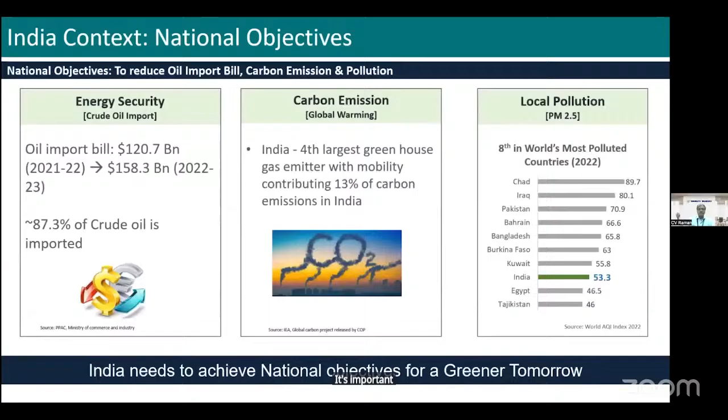And so it's important that we work towards that. Future regulations are focusing on these aspects - emissions, safety, as well as connected vehicle perspectives.

Phase-wise CAFE norms - the first two phases are already there, set in 2017 and 2022. The next phase is under discussion. We have already implemented BS6. For Phase 2, we are going to move to WLTP in 2027.

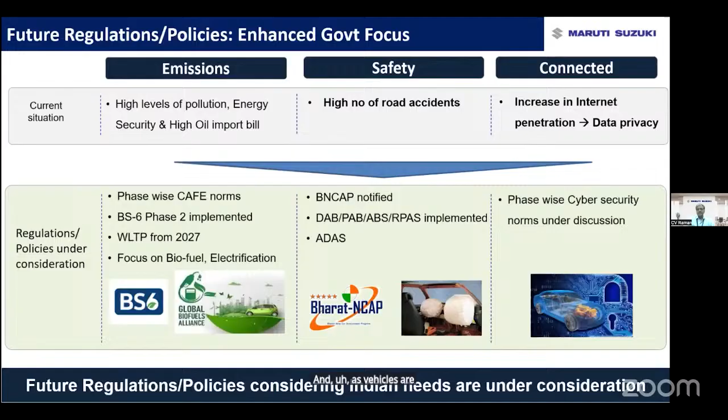There's a lot of focus on biofuels and electrification. From a safety perspective, we already have BNCAP, which has been notified, and we are working on ADAS related technologies going forward. As vehicles get more connected, cyber security norms are also under discussion, phase-wise.

Now coming specifically to passenger cars, you can see the growth that is going to be there. In 2030, we should be almost 6 million, and by 2040, we could be about 10 million vehicles.

Growing this market in a very sustainable way is going to be key. But one thing which is there is that the customer is also changing as we are, and we are making products for the customer.

The customer is always looking at the exterior, the interior, and also the aerodynamics of the vehicles. In a way, we all want to make sure that the customer is satisfied through appealing products, and that's what brings the customer into the showroom.

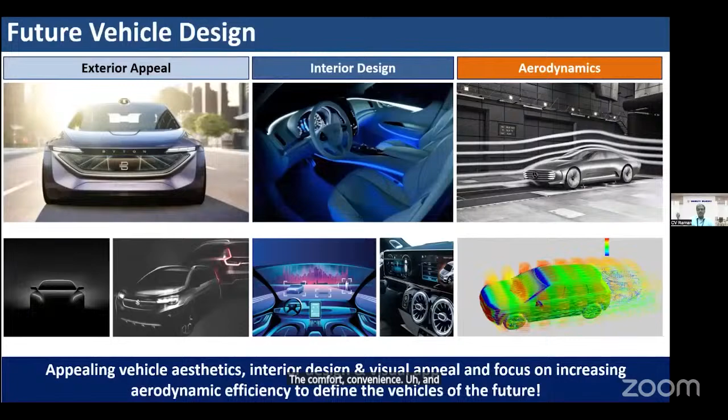But having said that, the next step is that the performance has to be good, and he also looks at the comfort, convenience, and of course fuel efficiency is also important.

Coupled with that, the industry is also working towards various new technologies from a sustainability perspective, and from the requirement perspective - in terms of electric mobility, advanced human-machine interface, as well as autonomous vehicles, or level 2 ADAS, and so on.

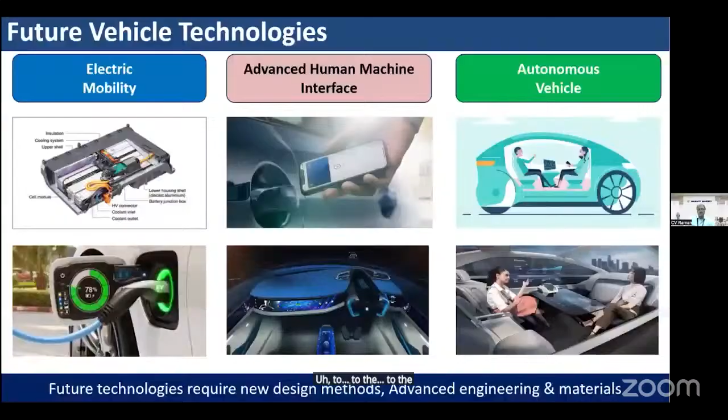All of this is increasing the features in the vehicle, and weight is something which always comes with anything you add to the product. So I think that's one of the key challenges which today all engineers face.

And there are technology disruptions which are happening. We all talk about autonomous, connected, electrified technologies, but today technology disruptions are also happening across other realms in the ecosystem. We need to be cognizant of that and make sure the auto industry is abreast of it, as we go through a major transformation, and that is good.

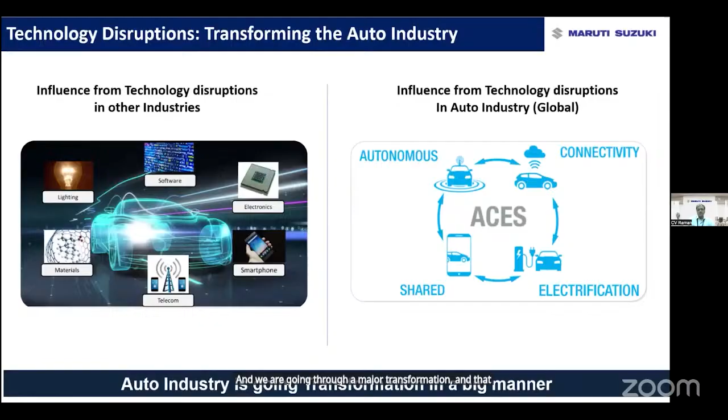We are going to see that in the next 5 to 10 years. The key question is: how do we drive this growth in a very, very sustainable way? So we'll talk a little bit about some of the technologies and things which we in Maruti Suzuki are doing, or we as an auto industry are doing.

We will be continuously upgrading the ICE powertrains, because that's something which is contributing to the fuel efficiency improvements. We also need to look at alternate fuels through CNG, ethanol, and flex fuel vehicles.

We need to look at hybridization, which is one of the key technologies going forward, electrification, and in future, fuel cells. The powertrain is going to continuously evolve, and these environment-friendly and energy-secure technologies are going to be key for mobility going forward.

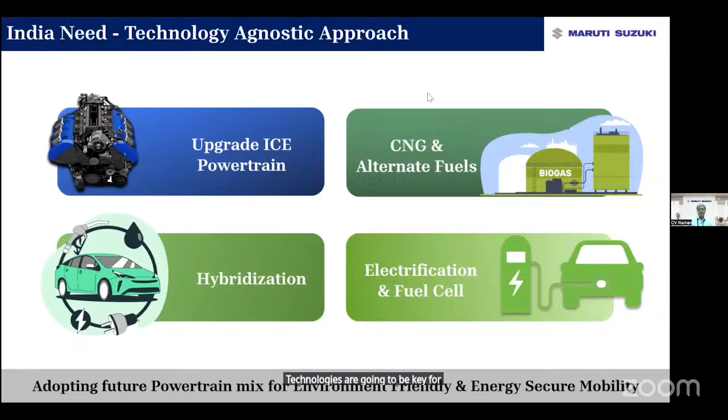But when we look at all these technologies, what I would like to bring into focus is that if you add CNG, there is an 8% increase in weight over the ICE vehicle. If you go to strong hybrid, the weight goes up further, and if you have an electric vehicle, the weight goes up even further, almost 1.5 times.

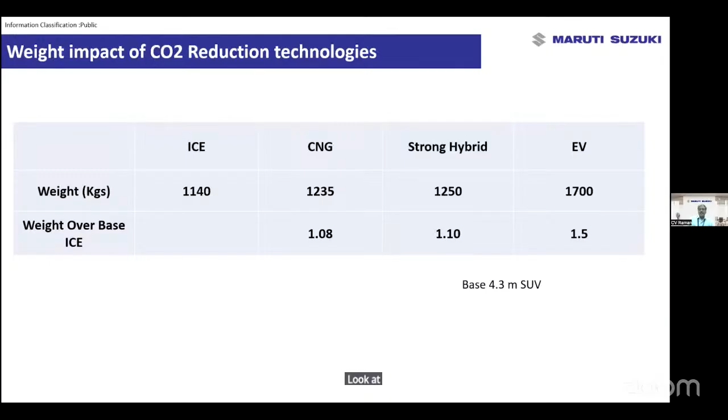So this is the thing which we need to look at - technology introduction means weight is going to go up, and when weight goes up, there is always an impact towards fuel efficiency. We have seen that any reduction in weight improves fuel efficiency and also improves the CO2 per kilometer. So that's the significance of lightweighting.

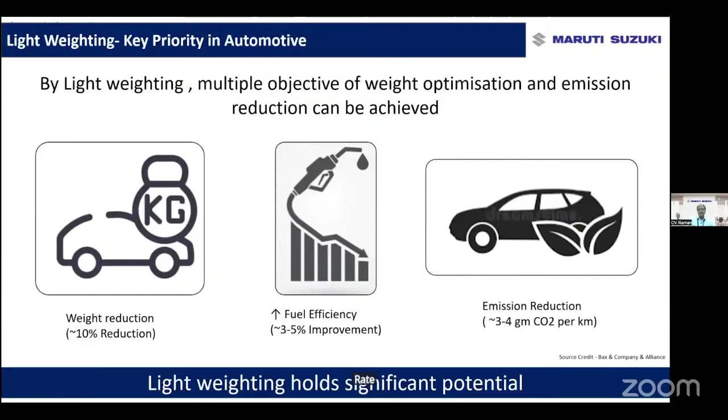In the auto industry, it's a compulsion - it's something which every engineer strives for, to reduce weight in every aggregate and every system which they are working on, designing, and manufacturing.

So I will just introduce Suzuki's global philosophy, which is Sho-Sho-Kei-Tan-Bi, which means smaller, fewer, lighter, shorter, and neater. It's a way of life. It's in the way in which we do our work. It's a way to design and manufacture our products, and this is required to be done by all stakeholders, not just by Maruti Suzuki, but by all our stakeholders.

That's what we are emphasizing, and that's the DNA of Suzuki global philosophy, which we are continuing to work on. Every engineer is given a target of weight when he is designing a part or a system, and it's to the extent it could be 1 gram per part, weight reduction is so important for engineers in Maruti Suzuki.

Some of the key initiatives which we have is changing over from sheet metal parts to plastic parts. Say, for example, a fuel box, we are changing from sheet metal to plastic. Fuel tank changed from metal to plastic. The casting parts being changed into plastic, or cast iron becoming aluminum. So these are various initiatives which every engineer is looking at in developing newer parts, and that all contributes towards the weight reduction of vehicles.

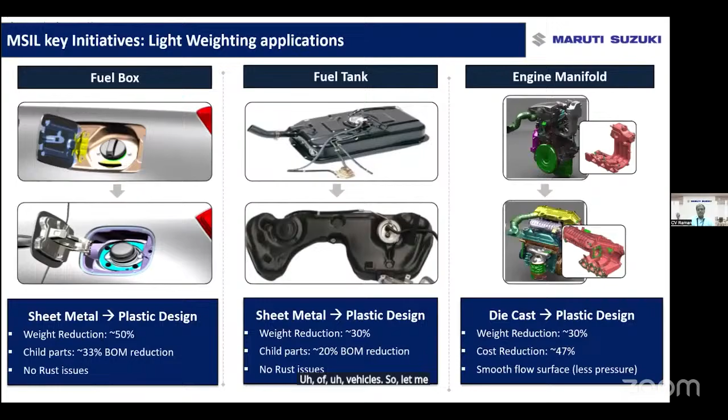Let me just explain this through an example. The Maruti Suzuki Swift was first launched in 2005, and over the last 20 years, we have seen 4 generations of the Swift. When we launched the Swift in 2005, the weight was 980 kg, the fuel efficiency was 12.36 kilometers, and it was a G13B 1.3 liter engine.

But over the years, you can see there has been increased use of high tensile steel. We have used things like plastic fuel tank. We have changed the platform to the Heartect 5th generation platform, increased use of high tensile steel. And the third generation, the weight was 855 kg. It was meeting BS4 norm.

So as the emission norms and regulations have become stringent, the customers' requirements and aspirations have changed. The content and the equipment has increased. However, weight is something which we always have been looking at, and we have reduced that weight. In the Swift 4th generation, today the weight is 900 kg, and we are meeting BS6 phase 2. The fuel efficiency has improved.

We have introduced a new engine. We have improved the NVH, and all of this, and we have introduced 6 airbags in this model. So all of this has contributed to weight increase, but from a sustainability quotient perspective, you can see the CO2 has come down in terms of the fuel efficiency improvement which has happened. I think that is what we say is in practice the Sho-Sho-Kei-Tan-Bi which we talk about, smaller, lighter, fewer, neater, is exemplified through this example of Swift over the last four generations.

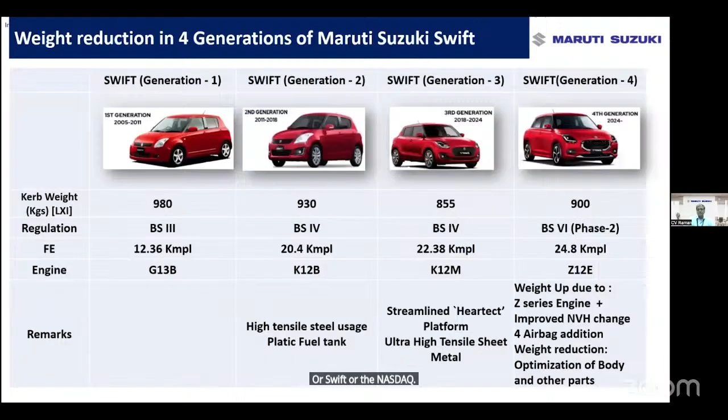Having said that, if you go to some generic technologies which manufacturers are looking at, every manufacturer today is looking at alternate materials. We are looking at ultra high tensile steel continuously, especially when we are looking at electrification, hybridization, and battery electric vehicles. As the weight goes up, every kilowatt hour of the battery contributes significantly to the weight. And if you want a higher battery capacity, 20 kilowatt, 30 kilowatt, 40 kilowatt, the weight goes up in the same ratio.

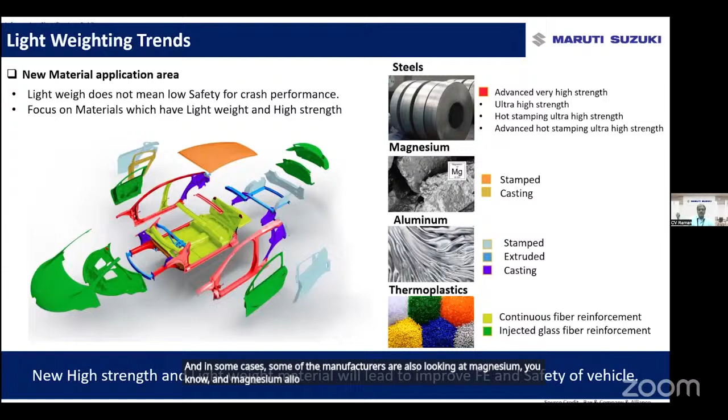So therefore, it's imperative that we reduce the weight, use high tensile steel, or use alternate materials like aluminum or thermoplastics. In some cases, some manufacturers are also looking at magnesium and magnesium alloys in a big way. So these are some of the lightweighting trends. And it's not just one system which one has to look at lightweighting - it's all the systems, whether it is powertrain, whether it is structural, whether it is acoustics and insulation. Every area we have to work on.

Say in CNG, or if you go in future towards hydrogen, blended CNG, we'll have to move towards a composite cylinder. That will reduce the weight also, but of course there is a cost impact. Similarly, composite materials in the structural areas, and looking at acoustics and insulation and other interior parts. We have to look at how to easily mold, identify, dismantle such parts, and I'll talk a little bit about that later.

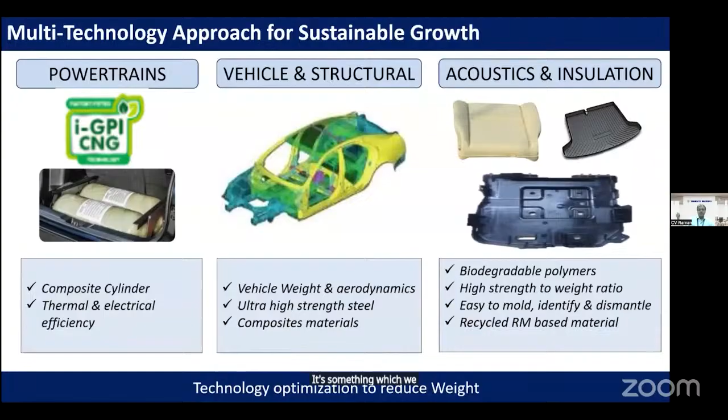And we have to make sure that high strength to weight ratio is something which we all work towards - improve the strength and reduce the weight. Talking about lightweighting in the electrification, that's something which we all need to continuously be abreast of. How we can reduce the copper content and reduce the weight using aluminum, or using higher conductivity copper wire, composites, make the platform itself lighter.

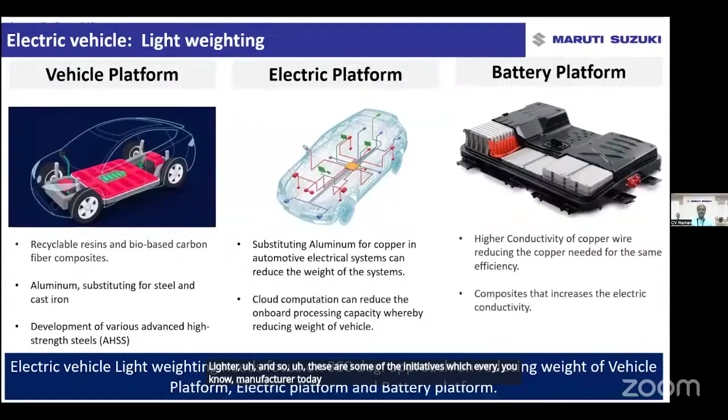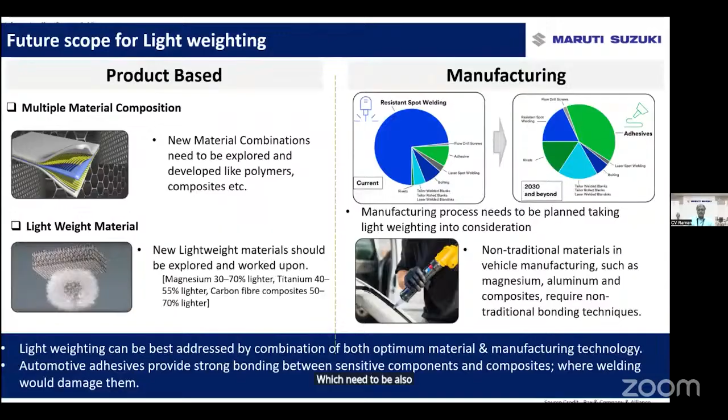So these are some of the initiatives which every manufacturer today is working on constantly. Also, when we are looking at lightweighting and new technologies, we should also be abreast of the fact that the manufacturing technology also needs to undergo change on the assembly lines, and we need to make that entire system also work. So new material combinations would mean new manufacturing processes, which need to be also addressed during this process.

Many of you would be aware that today manufacturers are going towards gigacasting, and this is a trend of the future, especially on EV technology. This is a big change from the traditional approach of building a BIW and doing assembly, going towards a gigacast approach. This makes a complete methodology change.

This definitely reduces the number of parts, reduces weld parts, reduces weight, and improves noise level. This was started by Tesla, now replicated by Chinese manufacturers. But having said that, there is a cost impact. So it's always about optimization of technology for the customer base, for the segments and products you are manufacturing, and what kind of technology can be absorbed by what type of product. Today from the lower end to the higher end, these are the various technologies available to auto manufacturers to scale up.

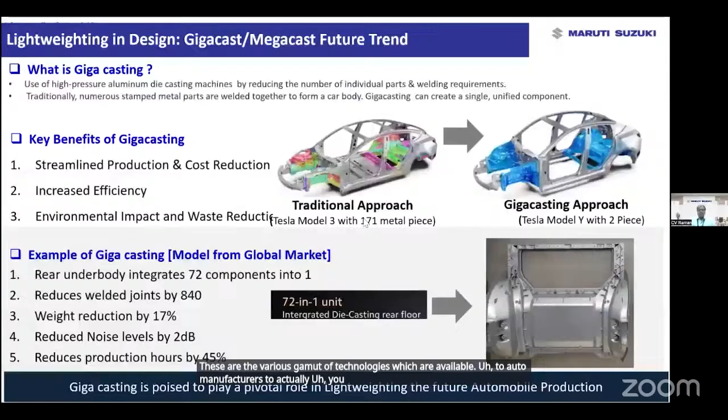Lastly, when we talk about sustainability, it's important that we talk about the circular economy. Today there are many new regulations coming in, and we want to make sure we are able to reduce, reuse, recycle, and recover parts. When it comes to end of life, in Europe there is this RRR regulation already in place, and in India too, I think we all need to work towards this. We need to reduce the amount of waste.

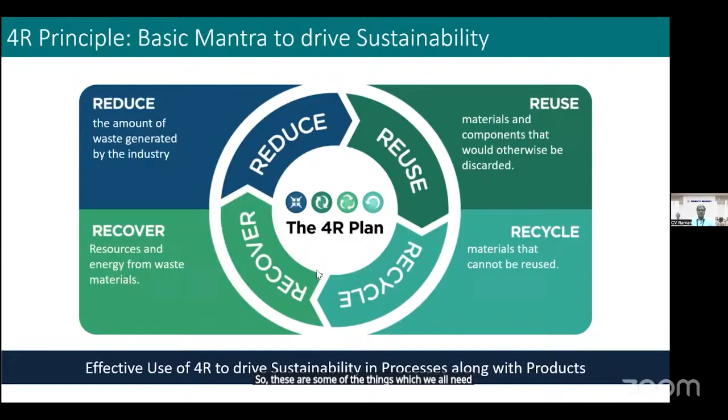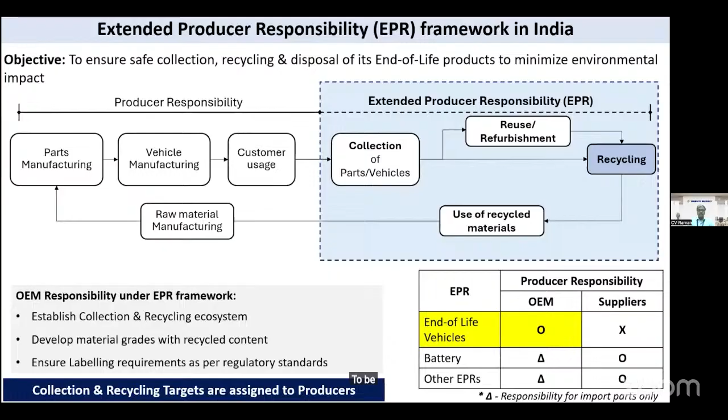We need to reuse the materials that are discarded, recycle, and also recover. These are some of the things we all need to work on. We also now have an EPR framework coming into India - today we're talking about steel, tomorrow we'll be talking about batteries - where the producer has a responsibility to establish and recycle, and use that back into the process. This is an ecosystem which needs to be developed, and all auto manufacturers are working in this manner.

As Suzuki and Maruti Suzuki, we are also working towards this - how we can use this Sho-Sho-Kei-Tan-Bi in our manufacturing technologies, and during the use phase, also setting up scrapping centers to scrap materials and reuse those materials back into the production process. These EPR guidelines give certain percentages of recycling to be done, and that's something which is work in progress at this point of time.

So I think a lot is to be done on the material side, on the design side, on the manufacturing side. Every engineer today has to strive that when designing parts, I have to also ensure that I move towards selecting materials which can be recyclable, and increase the recycling content in the materials I am using.

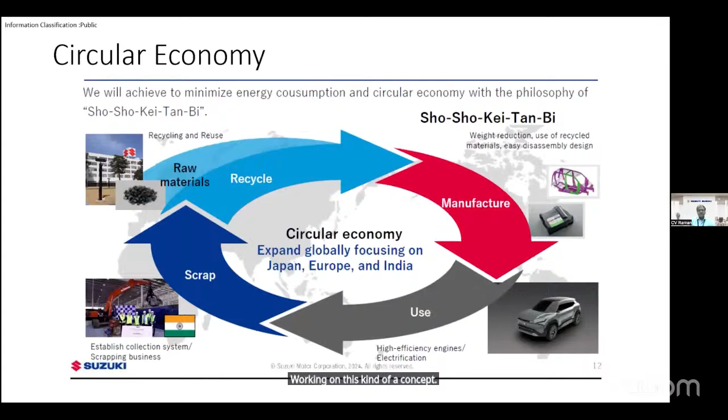I have to design parts which are easily disassembled. I use the manufacturing process which uses the least energy. I also need to focus that whatever product I make uses the least energy, and it should be easily dismantleable at the end of life, and then those parts should be recyclable. I think that's something all of us have to strive for, and every engineer today is working on this kind of concept. That's something which is going to ensure that we move towards sustainable development for future generations.

I think this conference today by Autocar Professional on lightweighting is very significant, and it's something we have been talking about in the past too - we have had lightweighting conferences - but it's something we have to continuously engage with, continuously work on and ensure that we all practice some of these areas, ideas into our processes and ensure we create a sustainable development for future generations. So thank you, Mayank-san, for having me, and I would like to end my presentation.

Thank you, Raman-san, for your kind words and for your excellent presentation. I think you've given us a holistic view - not just on materials, starting from design, then material perspective, and ending all the way to circular economy as well. I think in today's time, recyclability, as you said, with EPR coming in, is very important, and every company now is looking at it from that perspective.

Thank you so much for that insightful presentation. With your permission, Raman-san, I would now like to take a few questions coming in from the audience. I'll begin with the first question from Mr. Ramandeep: with a heightened focus on safety as well as increased cost pressures, how are companies managing to reduce weight while achieving high crash ratings and meeting costs? Could you also give us some grades of materials increasingly being used in vehicles?

Can you see the presentation right now? Yes, yes, we can, you can see the presentation. Yes, all right, yeah, please go ahead. Okay, all right, so thank you very much. I think we solved the technical issue at the beginning.

Thank you very much for giving us the opportunity today to talk about hybrid and lightweighting technologies, very specifically Sika Power and Sika Reinforcer. Denis and myself, we are going to share the computer and go through the presentation. The topics of today are definitely lightweighting with the Sika Power products, then some challenges and outlook which we have, lightweighting with Sika Reinforcer products, and also one of the business cases which Denis is going to show later on. Sika has more than 30 years of experience with lightweighting.

We have many examples of car manufacturers and OEMs around the world manufacturing vehicles specifically concentrated on lightweighting. We have examples where we can reduce the weight of vehicles by up to 100 kilos per vehicle through model change.

Specifically, we have Sika Power crash durable and structural adhesives, which are key contributors for automotive lightweighting design and multi-material joining. We also have Sika Power hem flange materials, containing glass beads, where we can definitely help solve topics related to hang-on parts.

Then there are anti-flutter adhesives - the Sika Seal products are outstanding in preventing bond line read-through, so-called BLRT. And of course Sika Power sealants, which provide extraordinary corrosion protection, specifically in water tightness areas.

So we are bonding today more than 30 million vehicles around the globe. What's extremely important to say - I won't go into the details - is that we have different philosophies among car manufacturers. As you can see here on the car, the adhesives are actually everywhere.

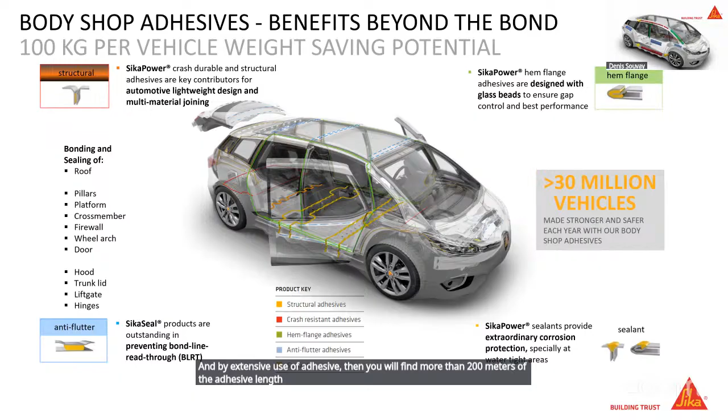I'll give you an example regarding battery electric vehicles, specifically because this is one of the mega trends, and also a motivation to move ahead in the direction of low bake or low temperature bake of the body shop adhesives. In this example we've been working with forward engineering together, and we have IC sill.

Here you will see the simulation with the side pole impact. When we look at a combustion engine vehicle side impact, what we see is that the battery, which is deflected, the edges of the battery are deflected, and there's always a possibility that the battery catches fire - this is not the way we want to go.

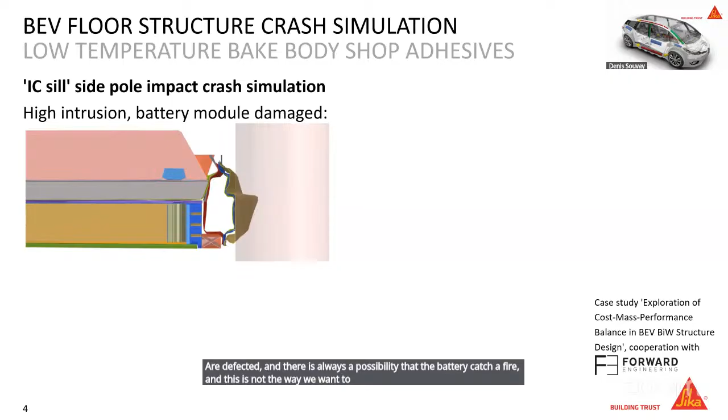These are the critical areas we see by the battery module, specifically by the battery frame. With battery electric vehicle sill, there is less intrusion and no module damage.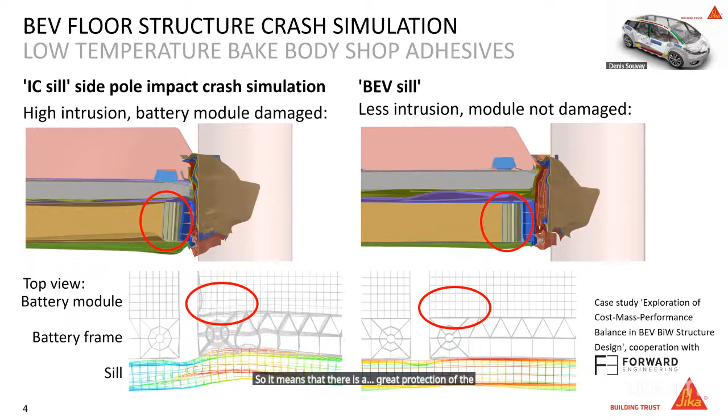One of the challenges specifically is due to the fact that the rocker area is getting much bigger. The energy which is in the E-coat is often not enough to cure the adhesive.

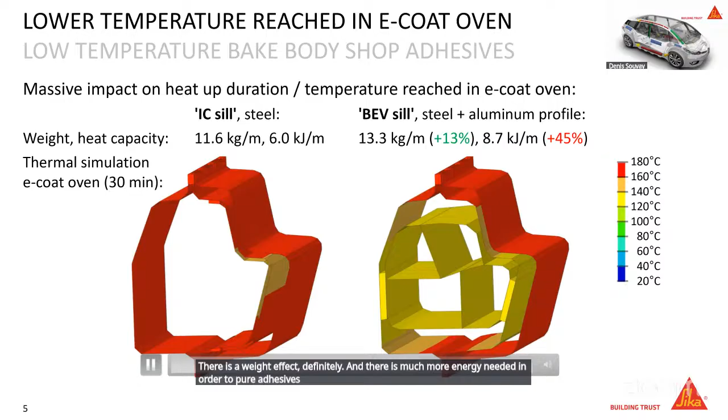Our solutions are the materials, specifically Sika Power MBX technology, which has been specifically developed to solve the delta alpha topic.

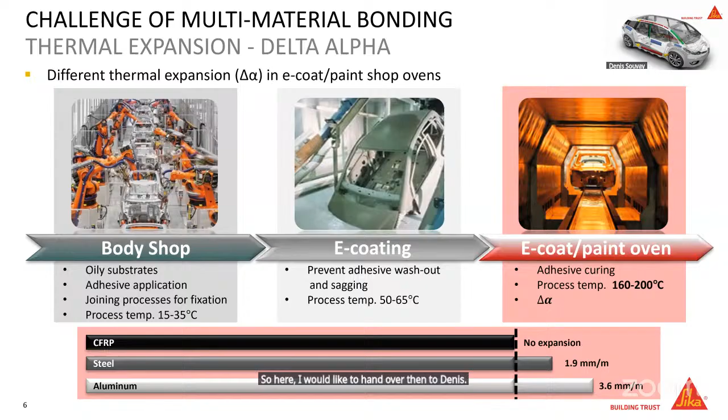Okay, thank you, Bobby. So you have seen the presentation from Bobby showing how we can bond different materials together, aluminium, steel, and so on. So the key in a good design of a car body is, of course, to use the right material, aluminium, steel, or plastics. But the key is how you will bond the components together.

And here, after the bonding example, I will show you some applications of structural parts. These structural parts are based on a plastic carrier made of a simple polyamide material with glass fiber reinforcement, plus another molding of a material based on epoxy, which will expand in place with the E-coat oven. So we have two types of application that we can make with this material.

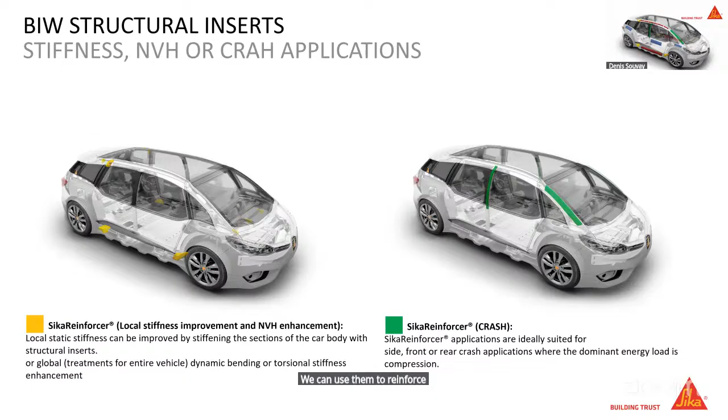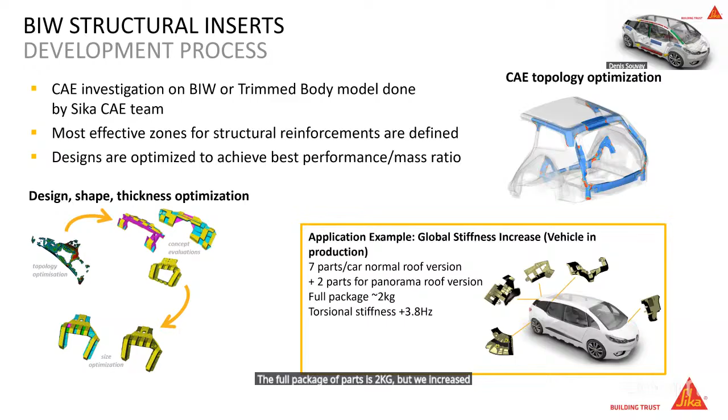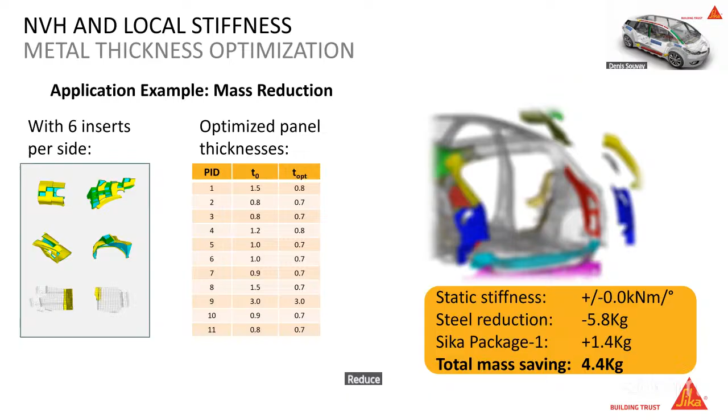Another solution we can propose to the customer is to reduce the weight of the parts by diminishing the metal thickness, and compensate the decrease of stiffness due to the metal reduction with an addition of structural parts. So you can see here the reduction of the different metal sheets. At the end, we achieve a reduction of almost 6 kilograms of the steel weight. And the Sika package was 1.4 kilogram of plastic parts, and we reduced the mass of the car by 4.4 kilograms. So these are solutions we can provide to the customer.

Now, the plastic component, we don't imperatively want to substitute aluminium or steel. Alone, one material is lighter than the other, and so on. But the combination of the different materials makes the design smarter and lighter at the end. So here we have compared the reinforcer technology, the plastic parts with aluminium, with steel, and so on, and it drove us to define a new solution for the sill application. So you can see here.

So it's a combination of steel cold draw profile with some parts placed at a very key area. With this system, we can solve some issues that we can meet in this area. The first one is, for example, the thermal expansion of an aluminum profile in a steel body. The assembly of an aluminum part in a steel body can be very, very simplified with this solution. With this solution, we have very good access of the heat inside the sill to cure the E-coat and the parts itself and reinforce the body.

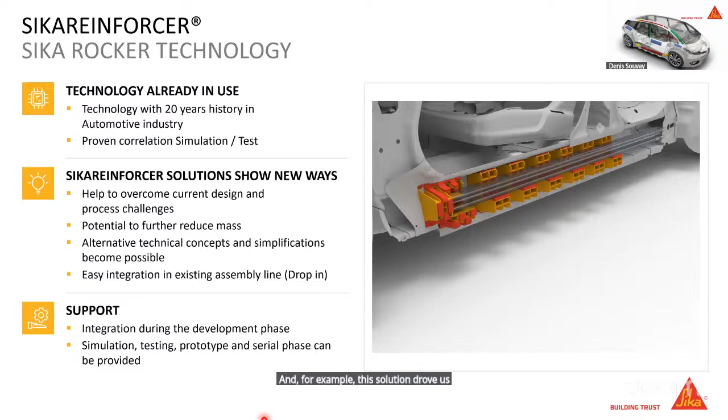These are solutions that we can provide to our customer. We just need common work with the customer. And for example, this solution drove us... so, wait a second. So this solution, for example, we compared with an aluminum profile. With this solution, we reduced the weight of the car body by 3 kilograms, and we decreased the global warming potential of the solution by 57%.

So, as I said, the way to use the different materials together can drive to weight reduction at the end. So I'm at the end of my presentation right now.

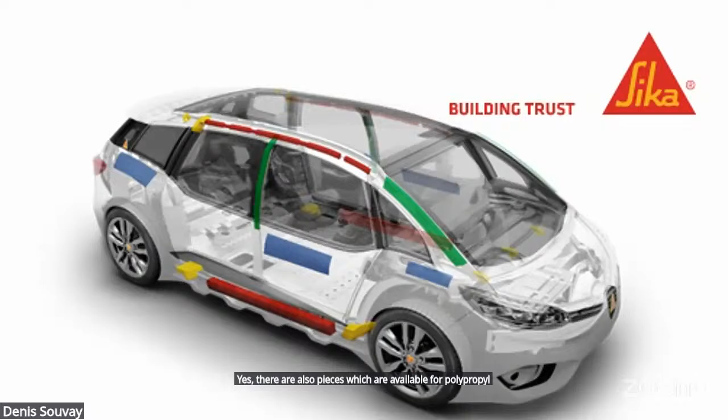Yes, there are also adhesives available for polypropylene. In some of those cases we also need some treatment because of the polarity of the material, but there are adhesives available for polypropylene.

Okay, right. Now we can see both of you. Great, I'll take another one, just the last one in the interest of time.

This is from Mr. Rengaraj. He asks, with the increasing use of Sika reinforcer epoxy-based expandables for BIW cavity, what validation do you have on their long-term dimensional stability and mechanical contribution?

This technology has been in place for many years, more than 30 years, so we have good experience on the durability of the material and of the part, and of course we are fulfilling all durability and aging tests required in the automotive industry.

It's a very standard one. And so we can provide more targeted input if they ask us directly. But these are solutions which are validated right now.

Just one more, Denis and Bobby. This is from Mr. Satish: Is Sika a replacement for traditional fastener fixations?

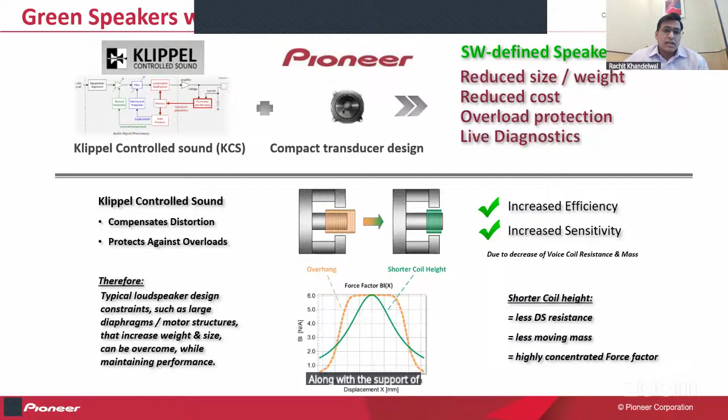Now, if I take a few examples and try to illustrate how this will work out in the vehicle. For example, there's a 16 centimeter speaker, which is a standard speaker used by most OEMs.

Now, if I design a green speaker for the same performance and the same efficiency, I can design the same speaker in a 10 centimeter, 290 gram format. So the size has been reduced by 40% and the weight has been reduced by 55%. We are getting the same performance, same efficiency, same sound experience, with a smaller footprint, smaller boxes, slimmer design, and more freedom in packaging.

This is where the OEMs need to work with us. We can always help them in designing the right speaker and reducing the weight of the vehicle tremendously. So if I talk about a 4+2 speaker configuration, which is a standard configuration, you can reduce around 1200 grams only from the vehicle just by changing the speaker design.

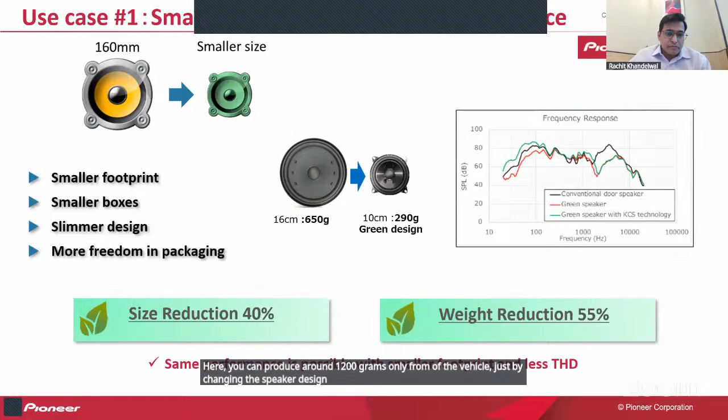Second, if there's an existing vehicle wherein there's a need to reduce the weight of the speaker, we can again design a speaker from a 16 centimeter speaker to a 16 centimeter speaker. If I compare a neodymium or ferrite type of speaker, we can see the weight has been reduced from 670 grams to 580 grams, which is close to 15%, and from 1300 grams to 995 grams, again close to 30%.

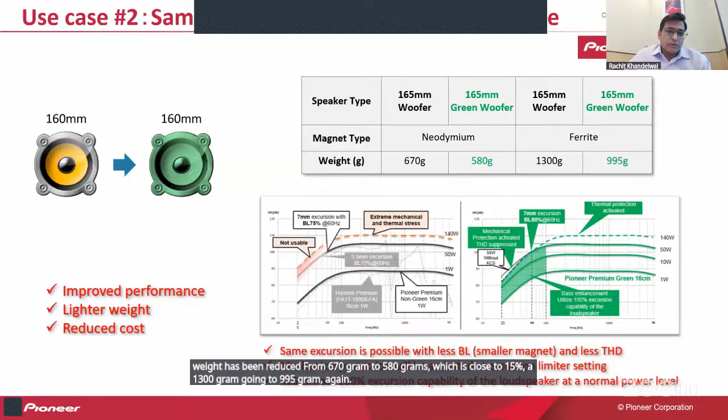So what we are achieving here is the same excursion, but with a smaller BL and also a smaller THD. Same mechanical protection is offered in terms of excursion, since we are controlling it through software — there's a limiter setting which can be set to save the speakers. And since it is software driven, we can get the maximum output out of the speakers.

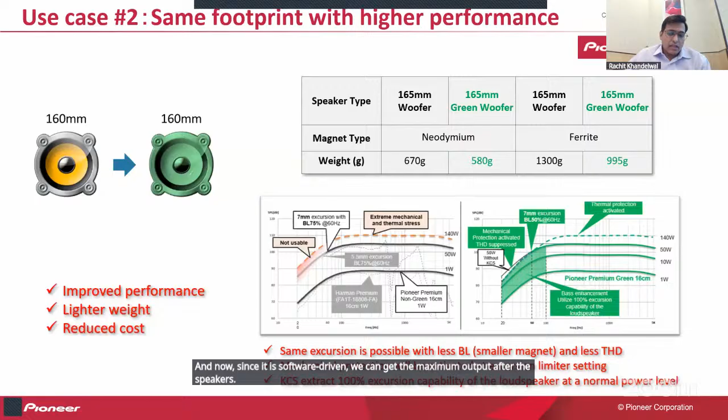Now, talking about the additional capability we can provide based on the speakers: since the THD has been reduced tremendously, we can get better frequency response from the speakers. Earlier, door woofers were limited by high distortion and high THD at 60 Hertz. Now we can extend the speaker performance till 30 or 40 Hertz, which helps in getting better bass performance, and we can even look at entry-level vehicles where we can remove the subwoofer altogether.

Along with that, since the speakers are now capable of playing lower frequencies, we can also reduce the ANC or RNC. The speakers are capable of delivering an equal amplitude, 180-degree phase shift, so it can cancel out all the distortions.

Now, if I talk about a hi-fi system, the basic requirement is low latency with high processing. This collaboration with Klippel is enabling that. It's an SDK residing on the head unit or the amplifier. It can be integrated into the current structure as well, and then it can deliver the best performance.

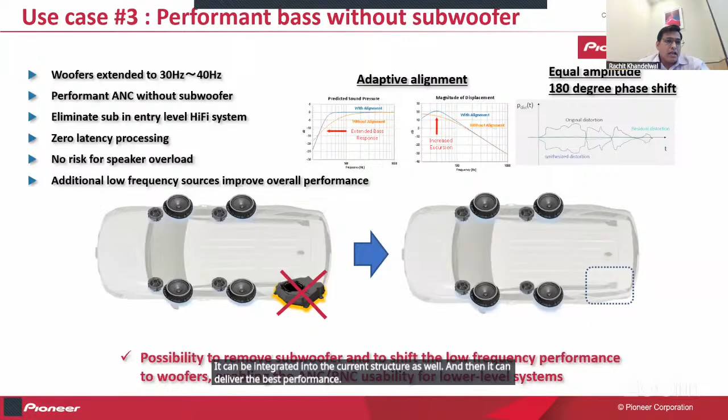Now, the major problem we are seeing in the market right now is once your speaker goes bad, the user is not able to understand the problem — whether there's an issue with the speaker, the infotainment system, or the wiring, or if a speaker is going bad, what is causing that breakage.

That's where the live diagnostic feature of these green speakers comes into picture. We can always ensure the reliability of the speaker by constantly monitoring it. We have diagnostics running on the speaker which can help identify any wear and tear, the status of the connection, whether the load is within limits, or if something has broken down. The system is always monitoring it, and with the help of this, we can reduce field issues and rejections by dealers or OEMs.

It also improves the lifetime of the speakers, because whenever there's an over-voltage or over-current requirement, the software can curb that. With the help of all these things, we can also design diagnostic tools which can help alert the customer whether the issue is with the wiring or the battery, and they can always be notified upfront if there's an issue.

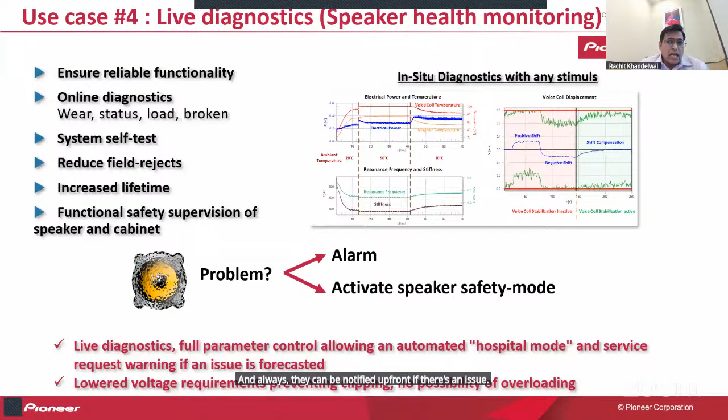Lastly, with the help of these speakers, we are always ensuring consistency, because now the software is always driving these speakers. They always monitor, so we know if the speaker is underperforming or overperforming, and we can adapt as per that.

Second thing, which is a major issue seen in the market, is that speakers are not designed for different climate conditions. For example, if the vehicle is driven at minus 30 or minus 20 degrees, or at 60 or 70 degrees, the speakers are always the same. There is no differentiation in terms of material and composition.

So what we now offer is, due to the software available on the head unit or the amplifier, we can always compensate for the loss due to temperature. For example, in colder conditions when the diaphragm is not expanding fully, we can enhance the signal to make up for that loss in performance. Similarly, at higher temperature, when the excursion is more, we can always control it to meet optimum performance.

With all these things, we have reduced the weight tremendously, reduced the size, and we are performing at the best optimum level. Now, the same 10 centimeter speaker is catering to 16 centimeter performance, and even the 16 centimeter speaker is reduced in weight. So what I can offer as a solution is the same speaker which can go into a commodity system, and the same speaker which can go into a premium or branded system, because everything is controlled through the software.

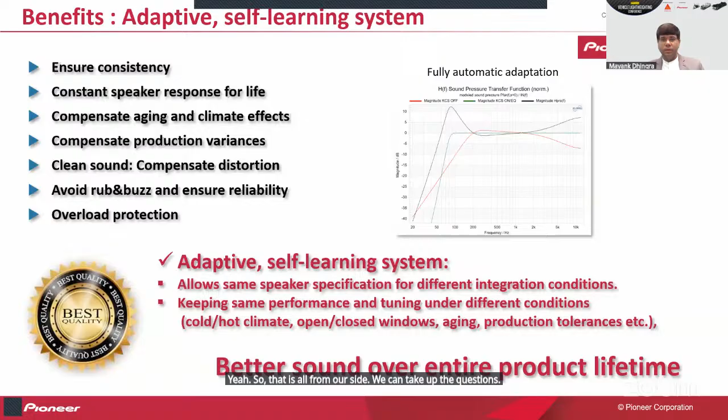So this is from Mr. Mandar Joshi: is it feasible to achieve Dolby 5.1 surround sound with these speakers, the ones that you showed? Yes, the answer is yes. Dolby 5.1 or 5.1.2 define various parameters which these speakers can comply with.

And the other question is from Mr. Vinay Mittal: are rare earth elements being used in the speakers? And if yes, what alternative do you see from China if there are import restrictions? It's a very broad level question, but a valid one. It's the need of the hour.

Yes, automotive speakers are always limited to only ferrite or neodymium. Yes, there is a dependency and a limitation with respect to rare earth material availability from China. But I hope the government of India will support us in getting it resolved, and we can all work with that. There are various other solutions currently being evaluated, but as of now, the answer is no for the availability of an alternate for this.